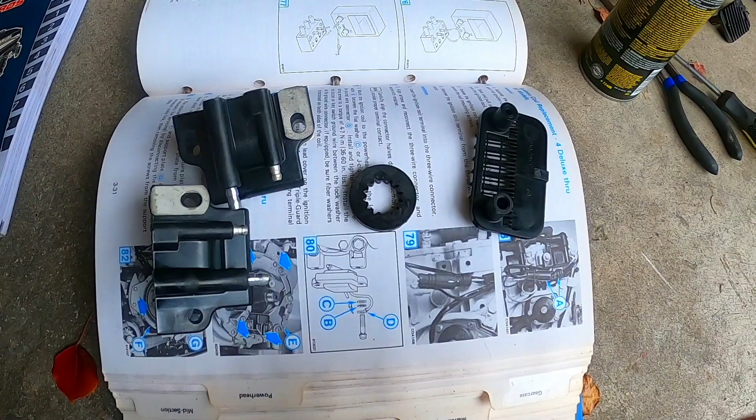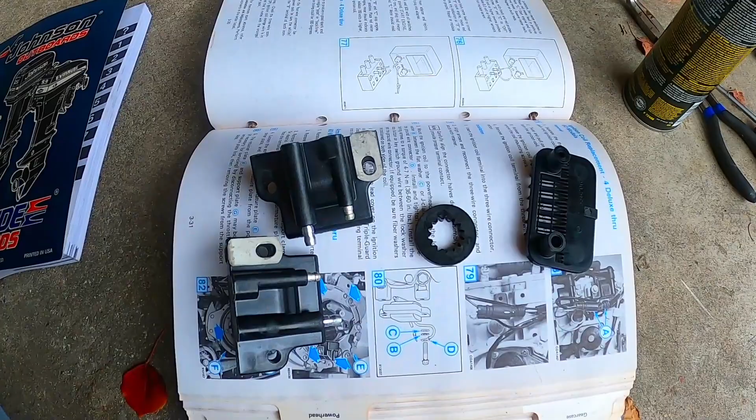All right, y'all, we're back out here with the Johnson 25-4 short shaft tiller, and been waiting on a few parts. Brand new coils. If you'll remember in that first video we talked about possibly needing coils because we weren't getting any spark, and one of them didn't ohm out right. But now I'm getting strong spark, so we're gonna stick with the ones we got and see what happens. But just in case we got new ones, in case those don't work out.

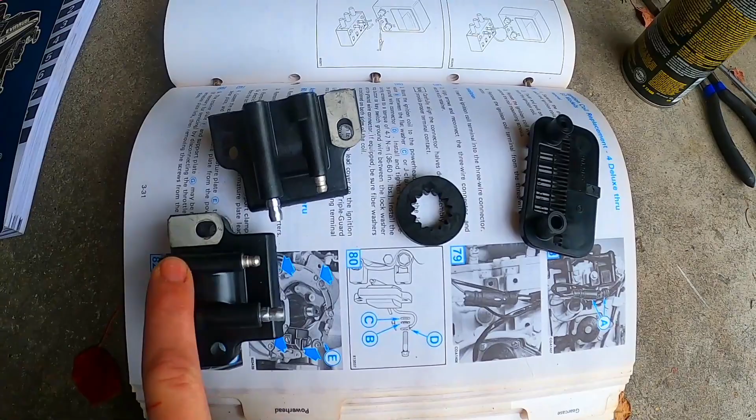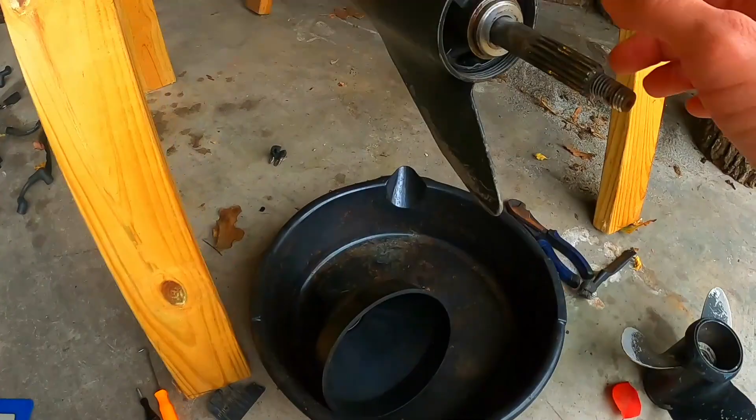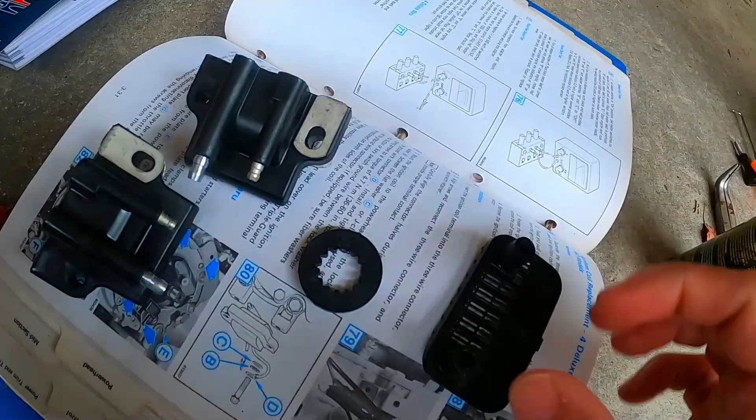Also, finally, the propeller spacer, and this isn't the thrust washer. The thrust washer is this right here. But this will get rid of all that play we had in the prop. If y'all remember that in the first video too, this was totally missing, and without it you don't want to run it because you won't get on plane, and then you'll just have a lot of wear on that prop shaft.

My other intake grate was broke, this one, and I ordered off of shop.evinrude, thinking that this was going to be both pieces, but it's not. It's just one, which is fine because I still have the other one, which is usable. So it was only one side that was broke, so we'll just go with that one.

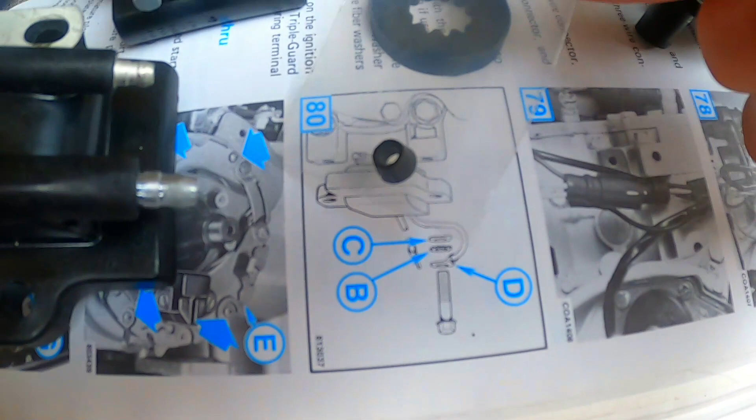Also, we have one more surprise. This is what we're actually gonna really need. It's fall in Texas. All right, this hilariously small piece right here, give you some reference, is the keeper for the shift rod. Sometimes they break. I just went ahead and bought one anyway, just in case I break the one on the motor right now, getting the lower unit off.

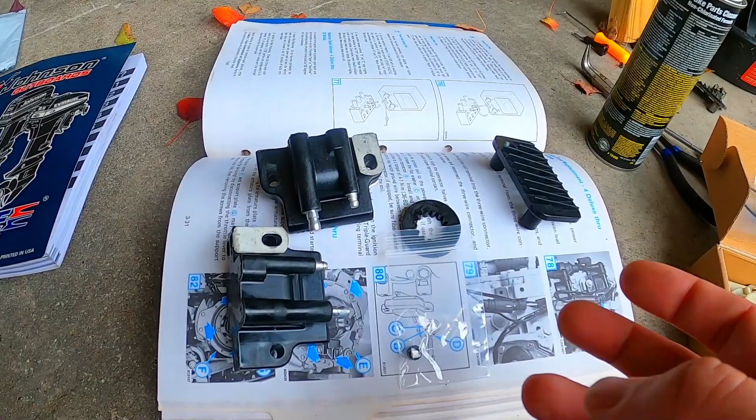So I mean, it's a little pricey, it's $6, but I just ordered it with another thing too, to save on shipping, which is right here, the water pump. Yes, because this one is smoked. I'm pretty sure the last time somebody tried to run it, I think I remember smoke coming out from the intake, so that's never good.

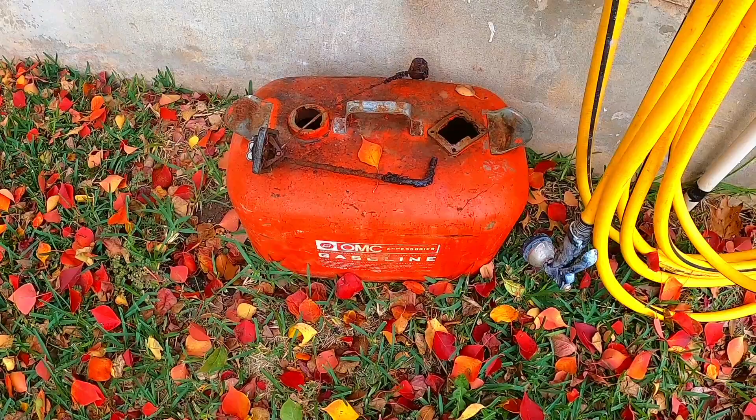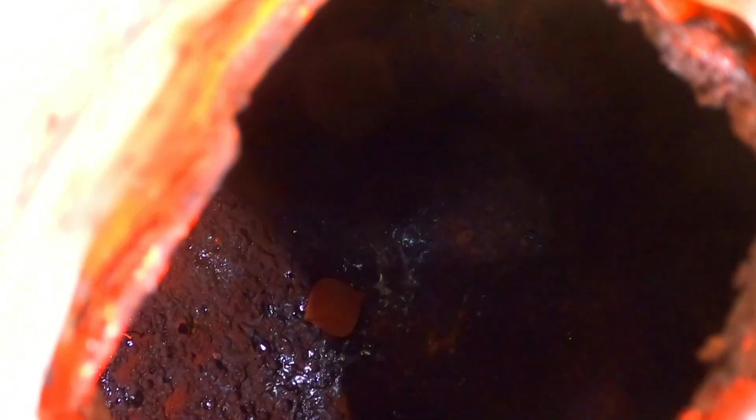Oh, and also you'll remember this can. Last time I said we were going to try to fix it up and use it, but I think that has changed a little bit. After cleaning it out, this is what it still looks like. I know I can get it clean, but it's going to be super hard to get all that stuff out of there to where nothing at all gets sucked up. And any little piece, I don't want that getting in my carburetor. So I think we're going to ditch that.

I'm just going to keep it and mess around with it, just, you know, like I said, I do this as a hobby, so just to see if I can get it back to the way it was. But for reliability and testing motors, stuff like that, we're just going to pick up a cheap, well, they're not cheap, but a 3-gallon plastic tank.

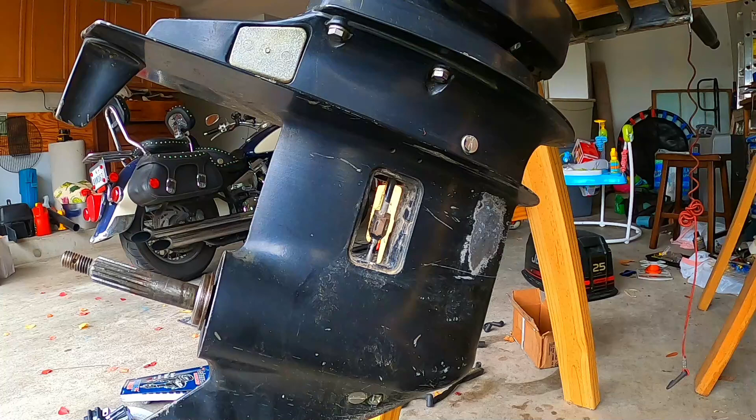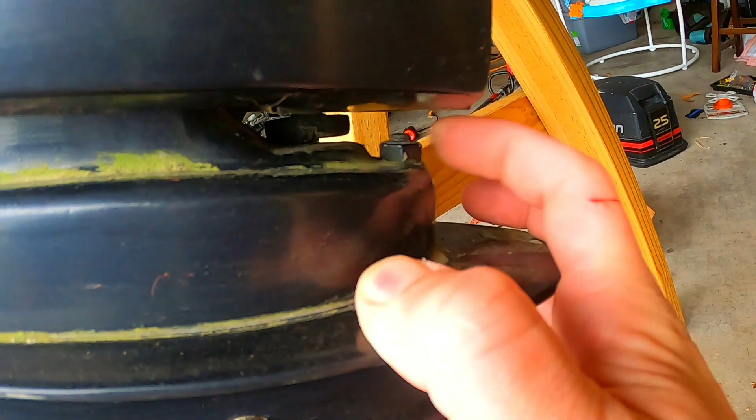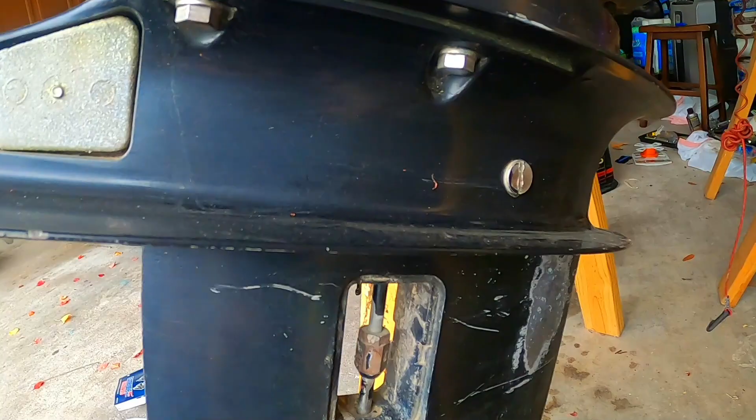All right, so to get this lower unit off, we have four fasteners we have to take off. This one, I don't know if you can see it, I'll have to move this nut on the stud right here in the very back, then two of these on each side. There's two on the opposite side as well. Then here's a shift rod right here. On these engines, it's not like the old ones, like on the old 15s, 9.9s, it was back here. It ran through here, and then once you drop the lower unit just a little bit, you had to take that connector off. On these, it runs right through the middle of the water pickup right here.

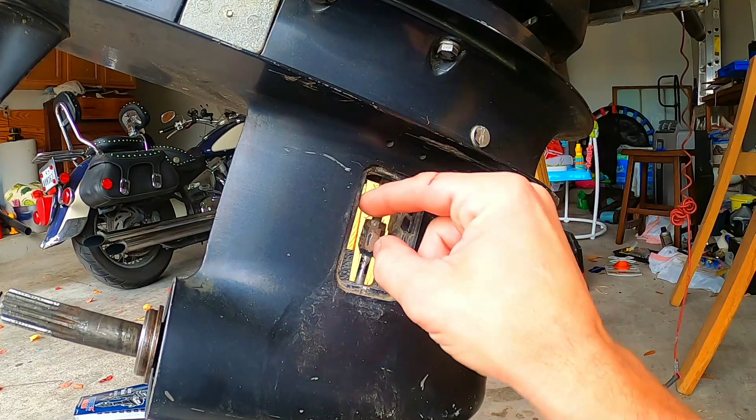So you'll need a wrench right here to hold the bottom one, and then to take this nut off right here. That separates, and then there's a keeper, like the black one I just showed you, the plastic one, on the bottom of this rod and the top of this rod. And that is what keeps them from sliding in and out. So you just take the top one off, so that way you can pull the lower unit down and it won't catch on the nut.

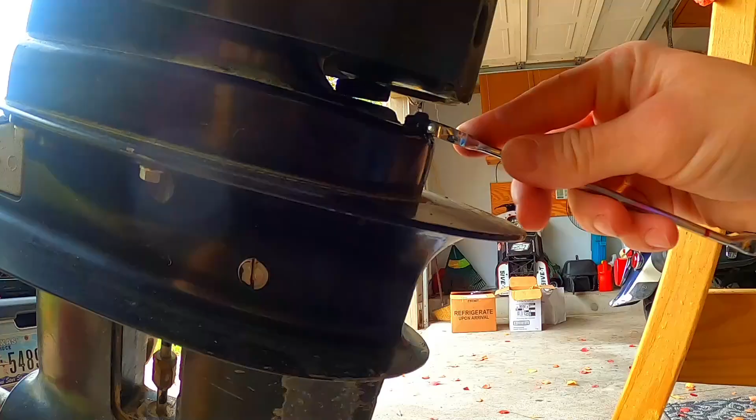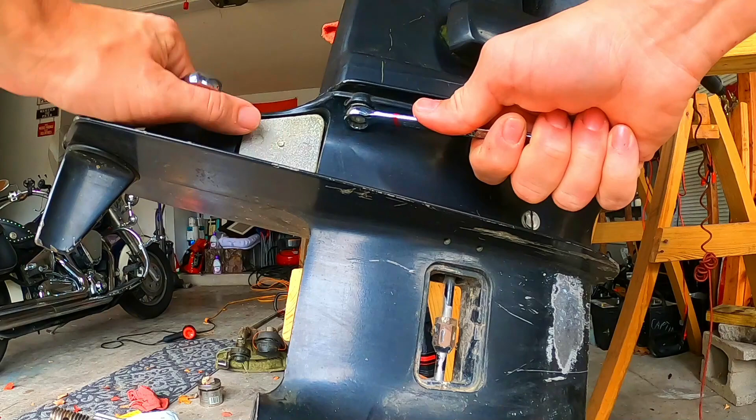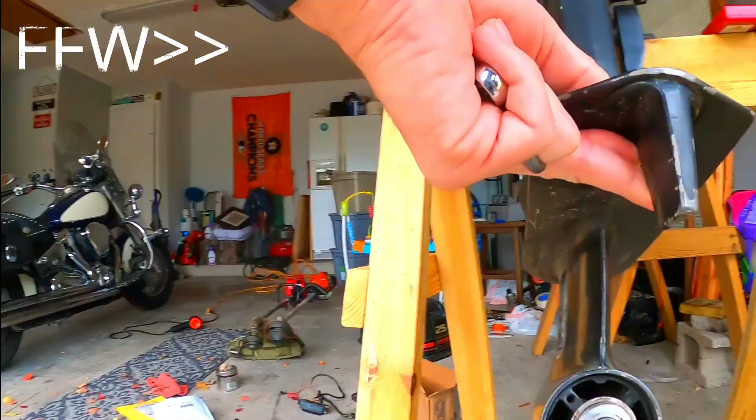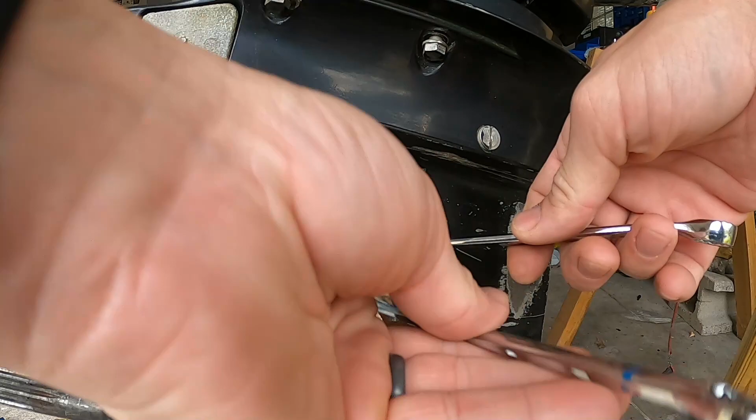Came out a lot easier than I thought. I'm gonna leave that hooked on just a little bit, just so it doesn't drop on me. There we go. Oh, yep. All right. So see, that's broke. It should just have a line right to the side, but that is a little more than that.

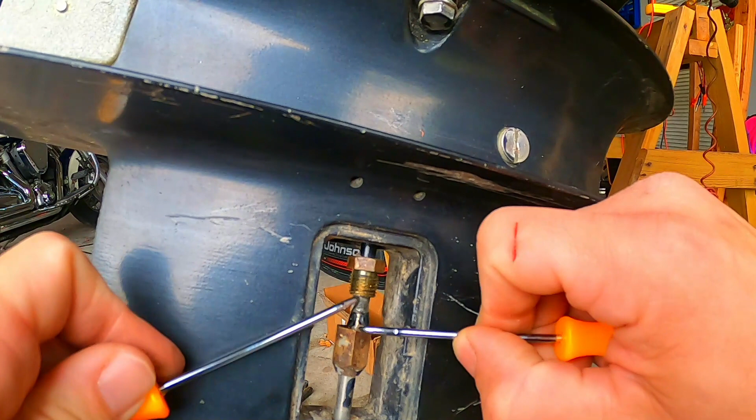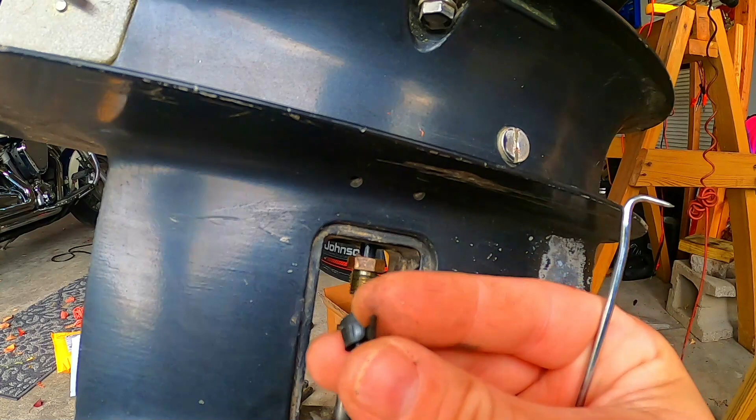That's missing plastic. The easiest way to get these is with a pick set. And you can probably guess where I got my pick set from. Harbor Freight. There we go. Missing the hole. It just should be this little crack right here. Should have just a little line through it. That's missing a whole lot of plastic.

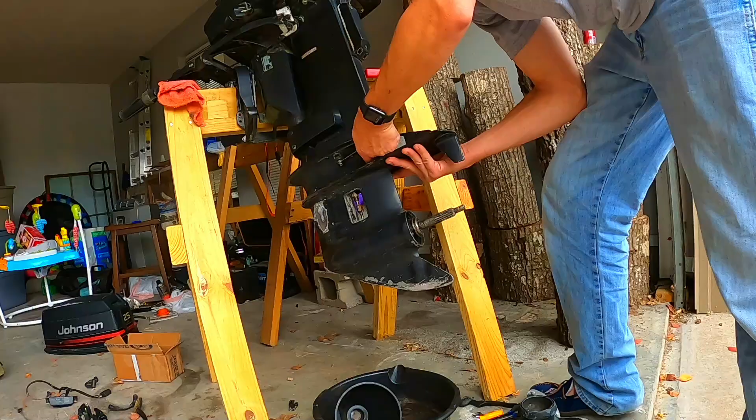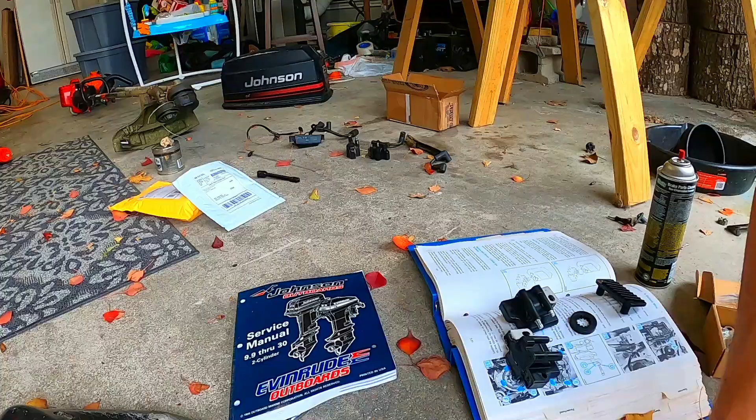All right. There we go. Also, when you're working on outboards, there's one more tool you must have. The bottle opener. Okay, so that entire time I was not recording when I was taking off the water pump.

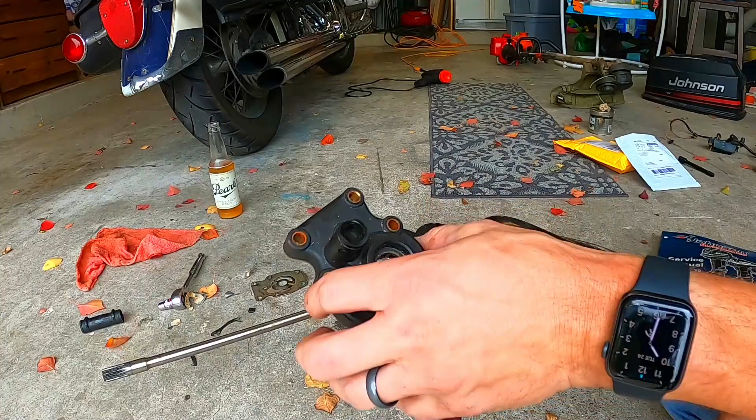But got the water pump housing off. We'll do a little reenactment here. But right there, water pump comes off. Impeller inside actually stays behind. But this is the old impeller. This is the old plate. You can see the gasket here too. When I pulled it off, it just came off in pieces.

It hadn't been running so long, there are actually cobwebs down here where it runs down to the water intake. So, and hardly any exhaust in here either, which made it super nice and very clean compared to what they're used to. Because usually these things are run a lot. There's exhaust everywhere, because that's where the exhaust runs out.

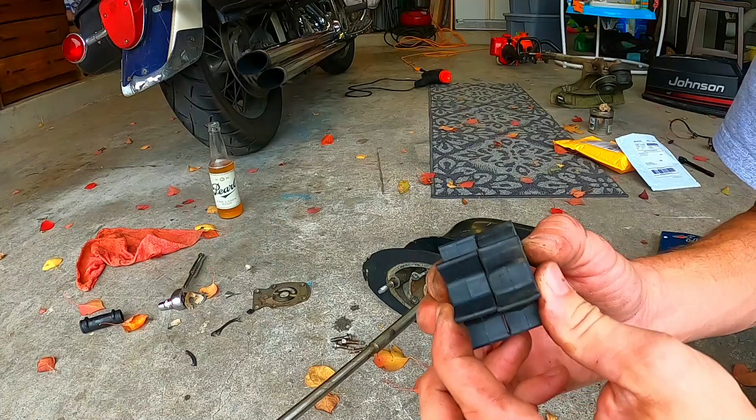So let's take a look at these two impellers. So you can see, this is actually pretty good. This is one of the better impellers I've seen come out of a motor. You can see right here in the back, it's starting to get a little crack in some of these. And that at some point is where you'd start losing these fins. You get sucked up in there. All sorts of bad stuff can happen. But we're just gonna go with a brand new one since we have it. Easy enough.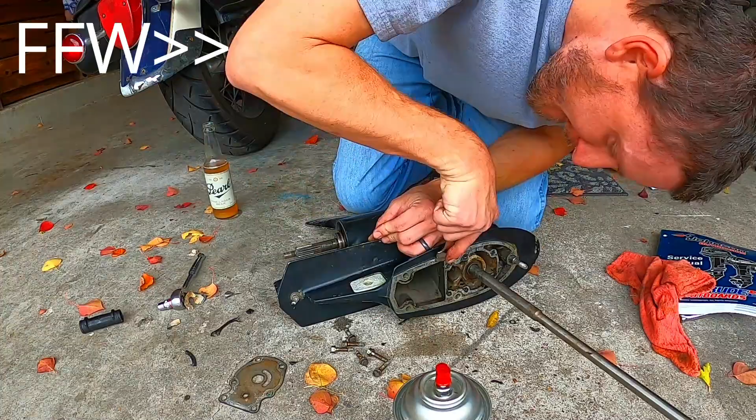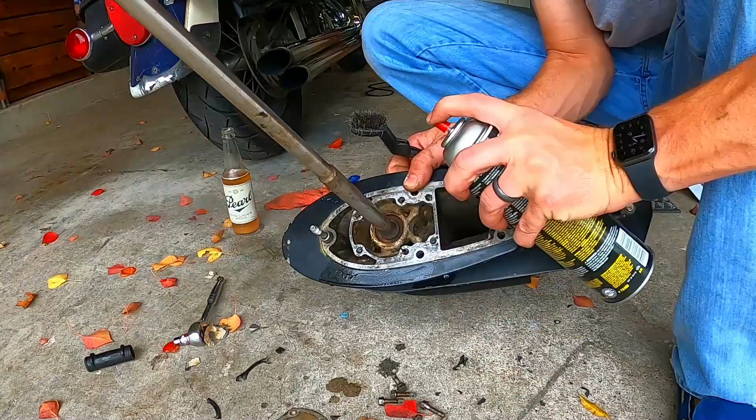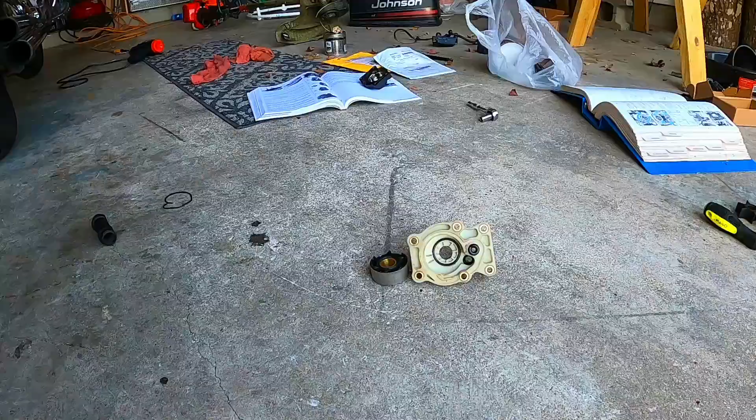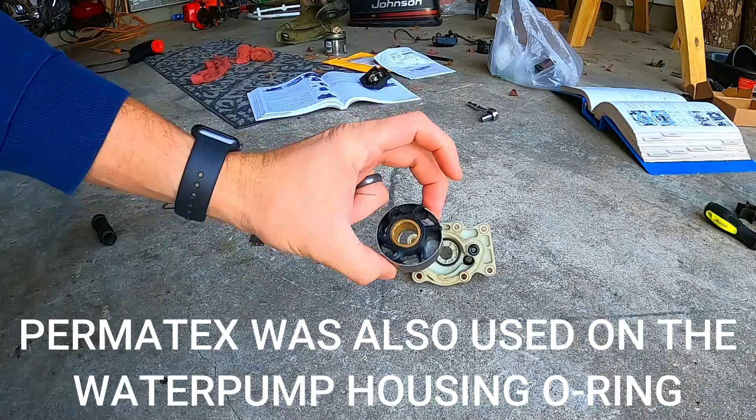All right, got a clean surface. Cleanish, a lot better than it was. All right, so we're gonna use some Permatex high-tack gasket sealant because they don't make the OMC gasket sealant anymore. So I think this is gonna work just fine. So basically we have to put this on the outside of the impeller cup and put it in the housing here. Just so it holds it inside the housing.

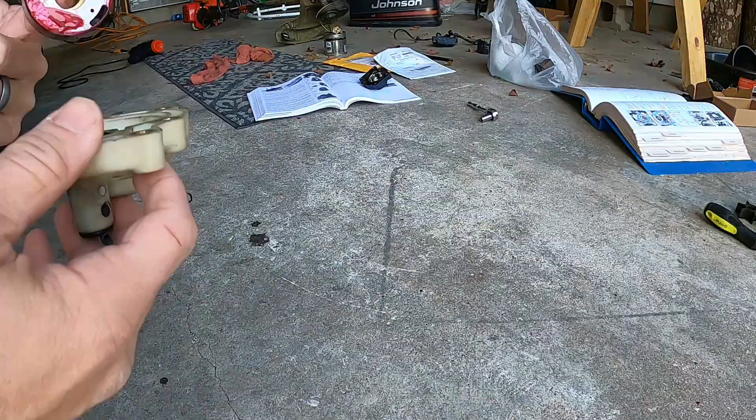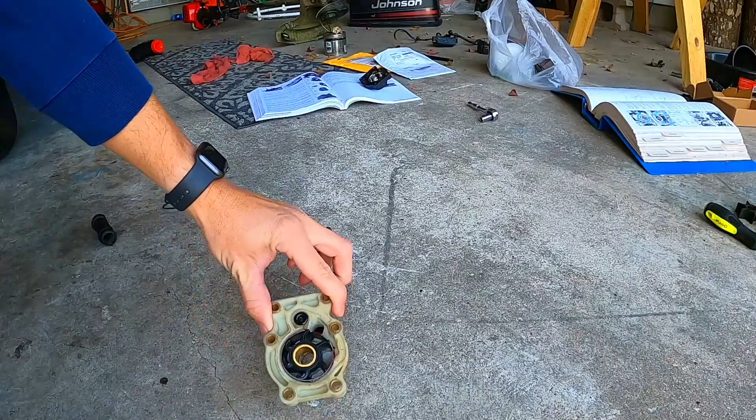Cool, that looks like it's working pretty well actually. All right, I'm also gonna put some just right here on the back of this, just so we can hold our gasket in place.

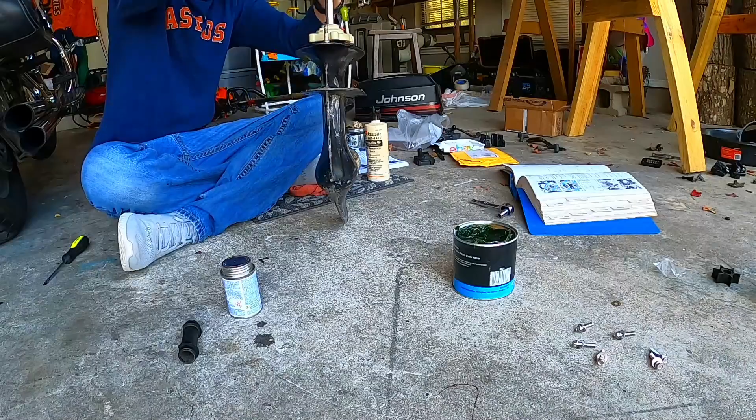What I had to do, and you couldn't see it because I stopped the camera for a little bit, but getting the flywheel key in was just not working. Or the flywheel key, the water pump impeller key. That's because I had the impeller upside down. I turned it over and everything went in smoothly.

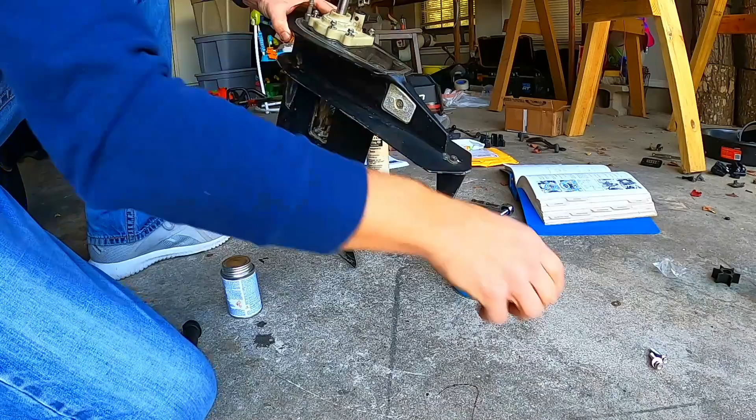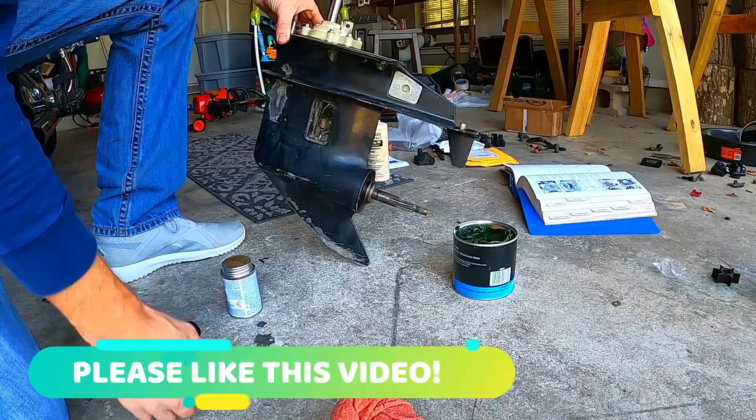So let's just hope I got the rotation right. The manual was kind of clear, but not really. It showed two different directions that the impeller was going. So we'll see. If it didn't work, then we'll just pull it apart and do it again. All right, all installed. Let's see if it'll go back in.

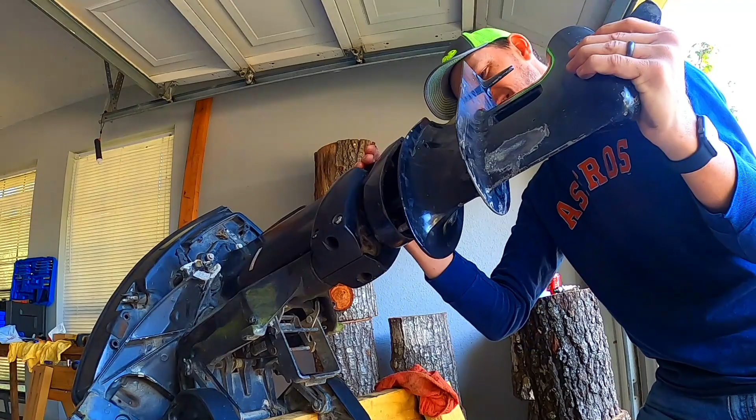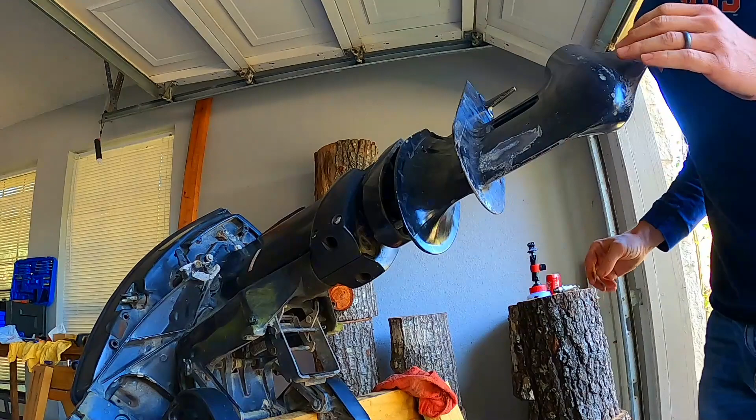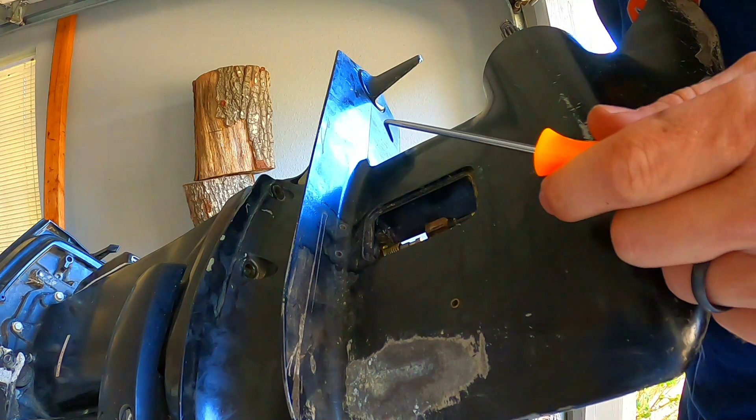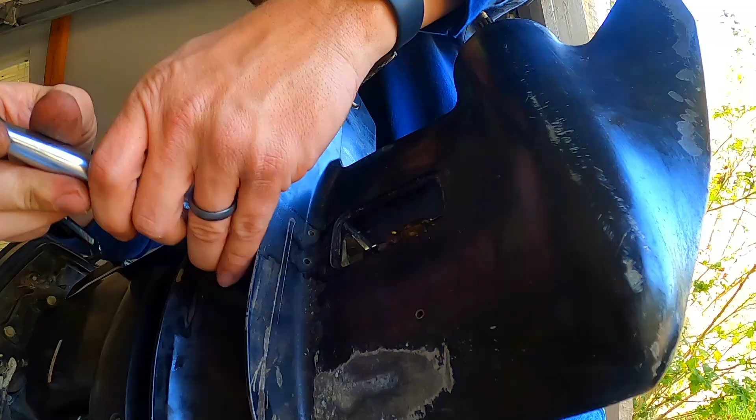Now I gotta try to put the bushing back in, which this thing is a little booger, I'm telling you. There we go. All right, in business. Make sure our water tube is lined up. There you go.

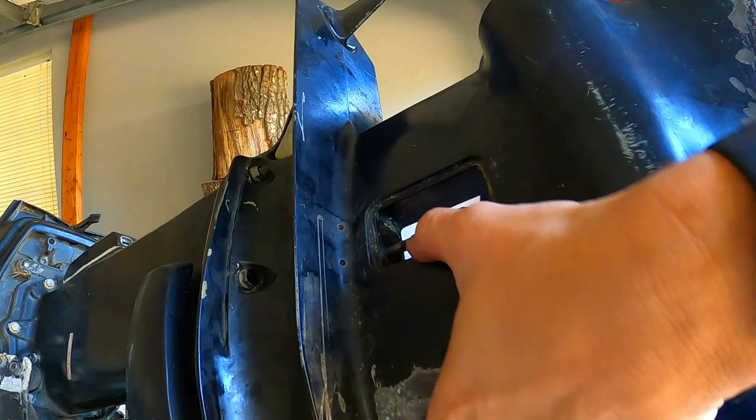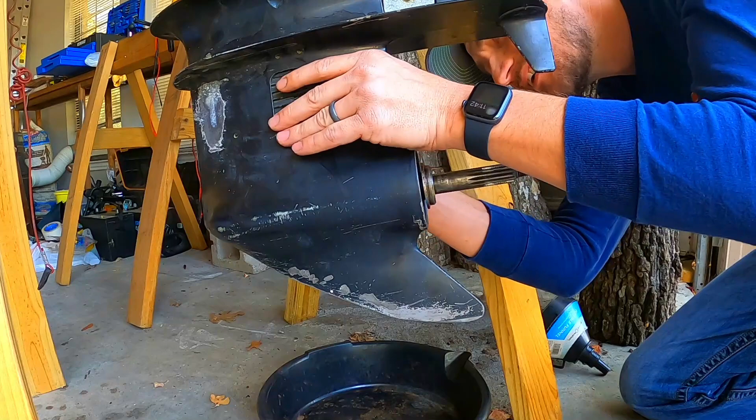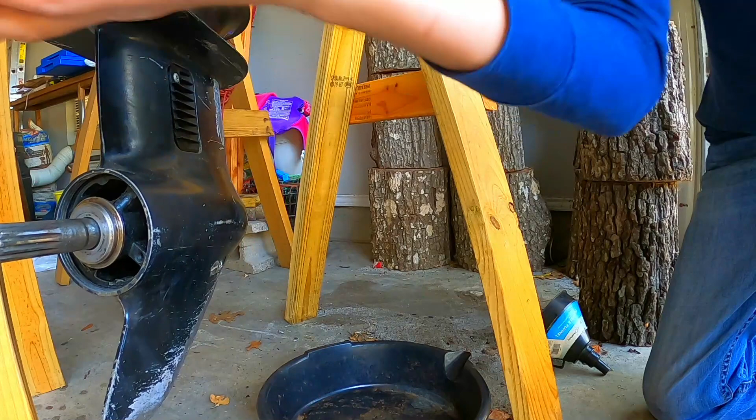So while we're down here, we're going to put the intake grates back on. Make sure you got them going in the right direction, just like so. There you go. There's the other side, the brand new ones. Now we'll put the prop back on. We're going to put a little bit of marine grease on there. Just a little bit on the splines of the prop shaft. Not a whole bunch.

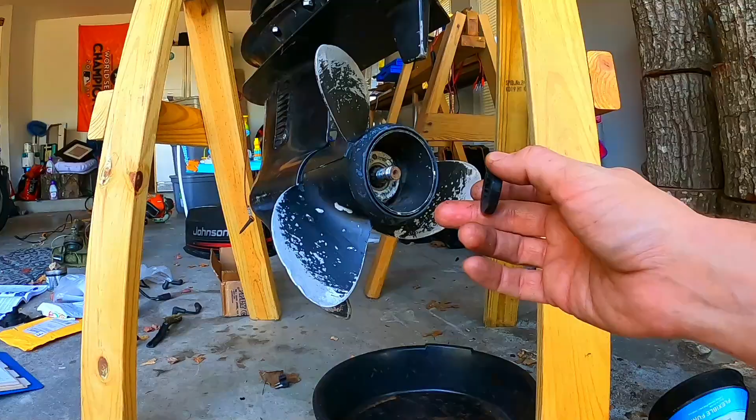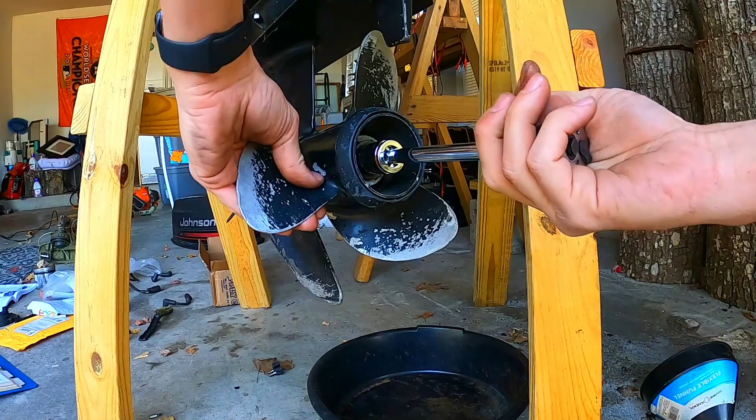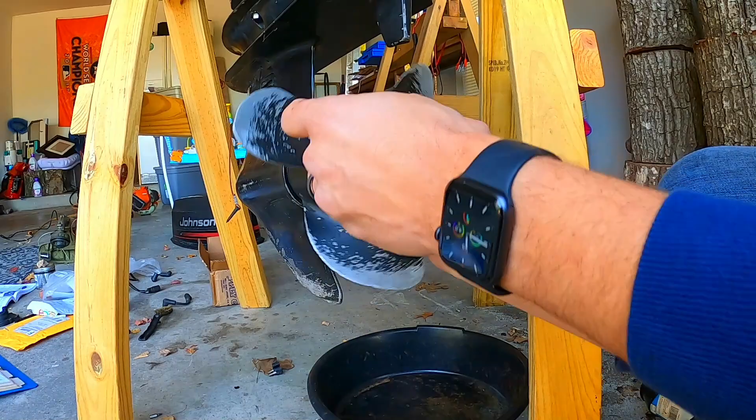Alright, there we go. Then we got our trusty spacer right here. Tighten it down and back it off just a tad, and then put your pin back in. That's about all there is to it, really. All right, get that bent up. That ain't going nowhere. Look at that prop. No play.

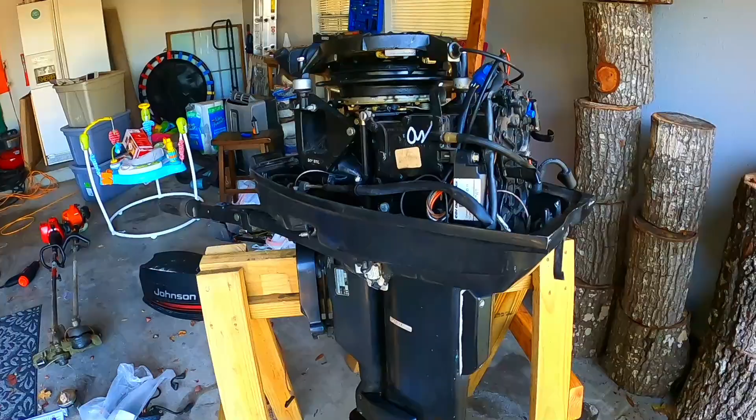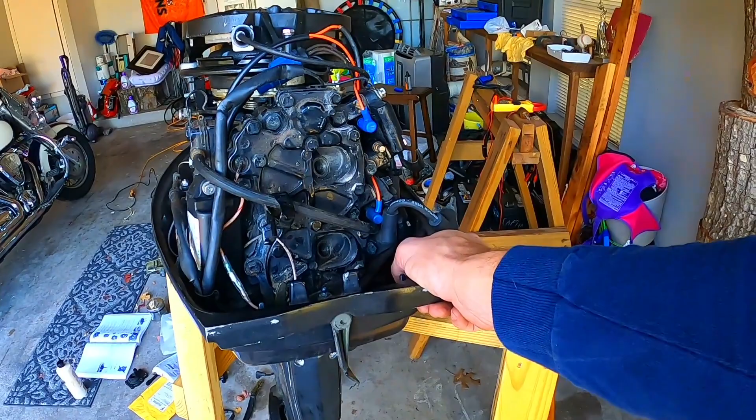All right, y'all. So we have the new water pump in. We have the new power pack, and we have spark again. So all that's left to do really is to get a fuel tank, get a fuel hose, and try to start this thing. Like if y'all remember in the first video, the compression is really good, and the carburetor has been gone through before, and this engine has not run since. So we're going to take a chance on it and see if it'll start without cleaning the carburetor. If we need to, we'll go into it.

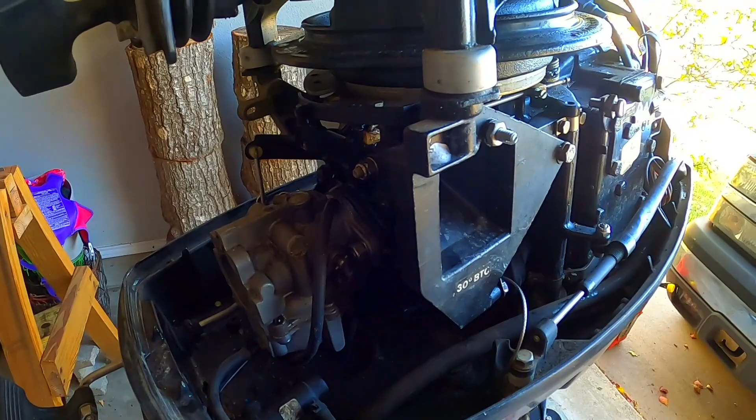But what I'm going to do before I start it, I've already kind of pulled these off, but this is to the primer, and we're just going to prime it, run the fuel through it, make sure it's all clear. There's one going to the top of the carb here, and then one going past the carb into the intake. So we'll make sure those are both clear and see how it runs. I mean, we have the essentials done for a motor that's been sitting, minus the carb, because if you don't know the history of it, go through the carb anyway. But this one, we know the history, so we'll just see what happens.

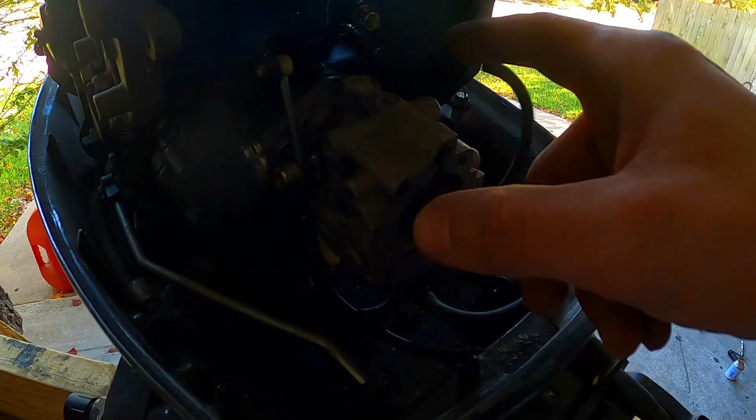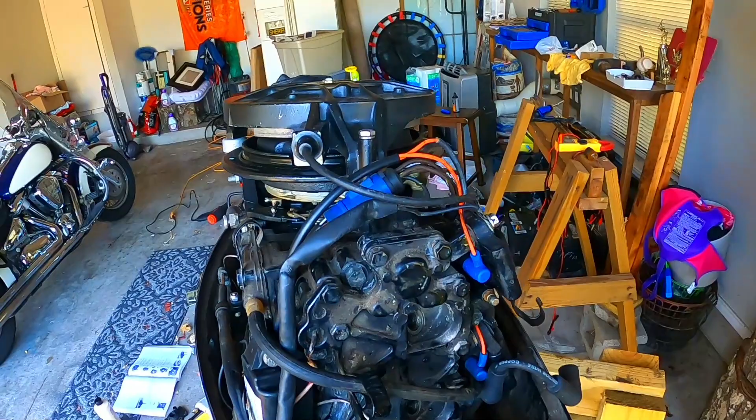Worst case scenario, we take one linkage off, and I'll show you here. Take this one linkage off and these two bolts and pull it off and see what's inside. Not a huge deal. I'm also going to clean this up. I'm going to put these back in their keepers where they belong, so that looks a little better. Other than that, this thing's ready to run. All right, since curiosity got the best of me, I poured a little 2-stroke mix in there. We're just going to see if she'll fire up.

And she does. All right, so that's exciting. That sounded strong. Wow. All right, now all we need is a tank and a primer bulb, and we'll be good to go.